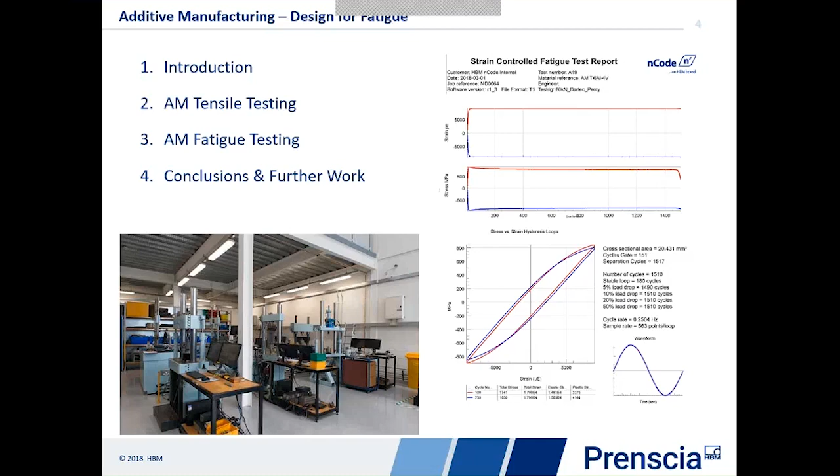I'll start with an introduction to what additive manufacturing is, then look at tensile testing and tensile properties of typical materials, then move on to what we're really interested in, fatigue testing. I'll conclude with some conclusions and a look at further work we're undertaking.

So why are we worried about additive manufactured materials and components? According to a British government survey, around $5.3 billion was the value of the additive manufacturing business sector in 2015, and the government's own figures show exponential growth. Clearly there's a lot of interest in additive manufacturing.

Why are we particularly interested in it from a fatigue perspective? A very recent report in 2015 from Lloyd's Register, the insurance company, showed that their number one focus recommendation was for the safety of systems containing 3D and 4D additive manufactured parts.

For those wondering what 4D means, these are components printed in 3D with residual stresses built in, so that when released, they can change shape. So we're manufacturing residual stresses into them, essentially.

That report goes on to say that fatigue is a principal failure mode of structural additive manufactured components, and it's a hurdle to its general acceptance. That's really where nCode comes in and why we're so interested, to find out if we can tackle that problem and make additive manufactured components safer and more reliable to use.

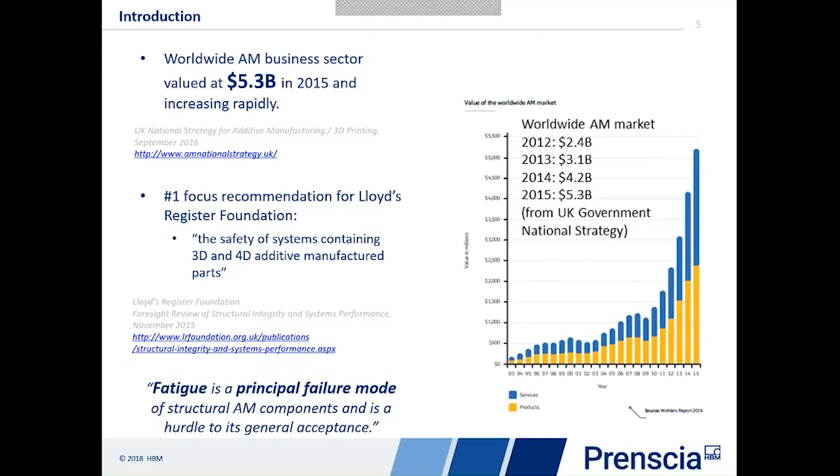What additive manufacturing gives us is a big increase in design freedom. It reduces the need for machining, and we can make components we couldn't before in an economical way, because we only use the materials we need. We don't have to mill them away from a solid block anymore.

Over the last 12 months, my colleagues and I have attended several additive manufacturing seminars, and almost all of them concentrated almost exclusively on topology optimization. A quick check on Google shows a huge number of companies dealing with additive manufacturing from this idea of optimizing.

But it's not all about shape. It's the material strength, and in particular the fatigue performance, which is crucial.

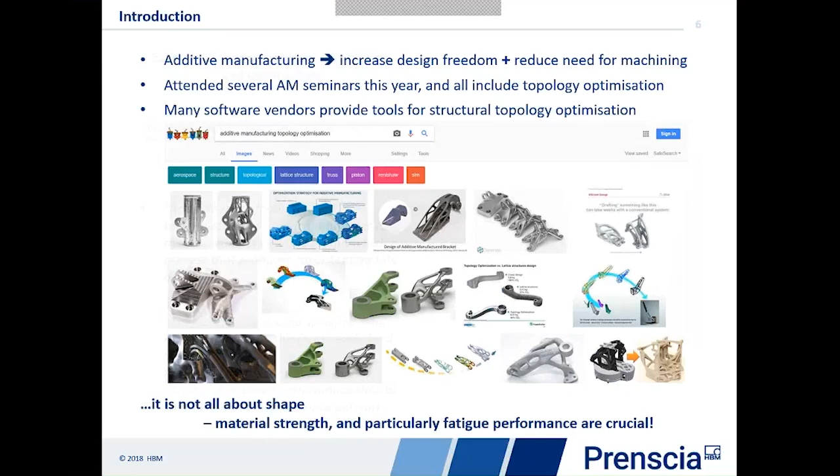Going back, this is again from Lloyd's Register, one example of a guidance note when it comes to certifying and qualifying additive manufactured components. It says additive manufacturing techniques have significant barriers to overcome in delivering a manufacturing process that produces consistent quality and safety. That's really what we're trying to tackle here.

It concludes by saying the acceptance criteria specified shall consider all reasonably foreseeable load cases. For example, if the part is subject to dynamic loading, the fatigue performance shall be specified with an acceptance criteria. It's about finding out how these materials behave in fatigue and how they differ from wrought materials.

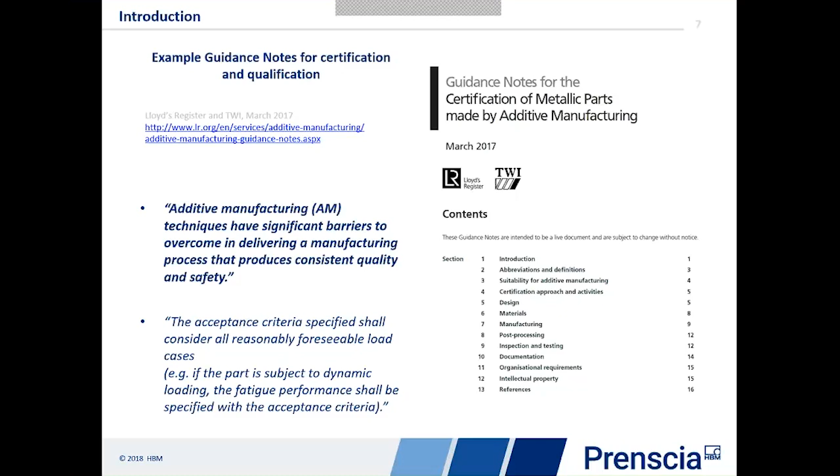Of course, this hasn't stopped us as an industry using these wonderful new materials and manufacturing techniques. Here are a few slides showing how they're used in different engineering sectors.

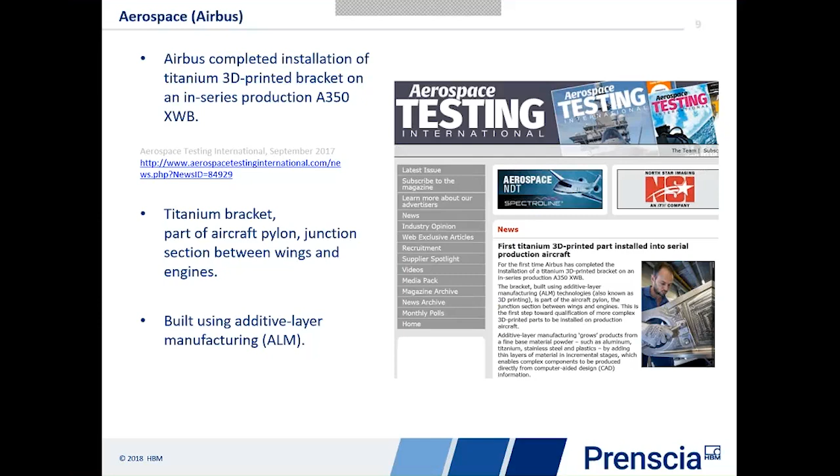Of course it's not just the heavy industries, we've also got aerospace. In 2017, last year, the first production component was put by Airbus into their production aircraft, a 3D printed bracket on the A350. And Boeing is not to be left behind, because last year they also approved their first 3D printed structural titanium components.

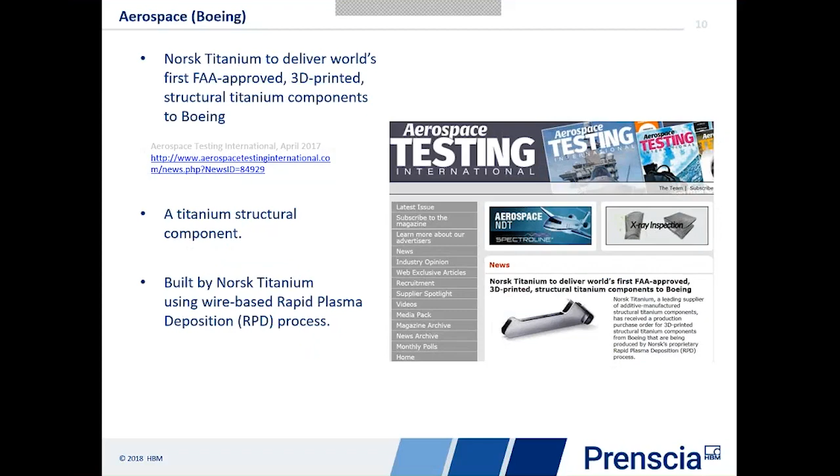There are other ways, as well as additive manufacturing, that we can start to build components. One of the key things is powder metal, which is one of the components of additive manufacturing, really.

So it's clear that additive manufactured components are actually very popular, and we need to discover more about how we can use them in our structural components.

So what's the objective of this presentation then? Well, primarily it's to show that fatigue testing is important when it comes to designing additive manufactured components. Secondarily, it's to obtain mechanical properties of a material, in inverted commas, that we can use in design and analysis.

I have to admit that when we started doing this work over 12 months ago, we'd had some involvement in additive manufacturing in fatigue, and up till that point, we'd not really found any materials that we've been given that have got acceptable fatigue performance at all. But starting really last year, we found then that we were getting components coming in which did show credible fatigue resistance. The key thing here is what constitutes a material.

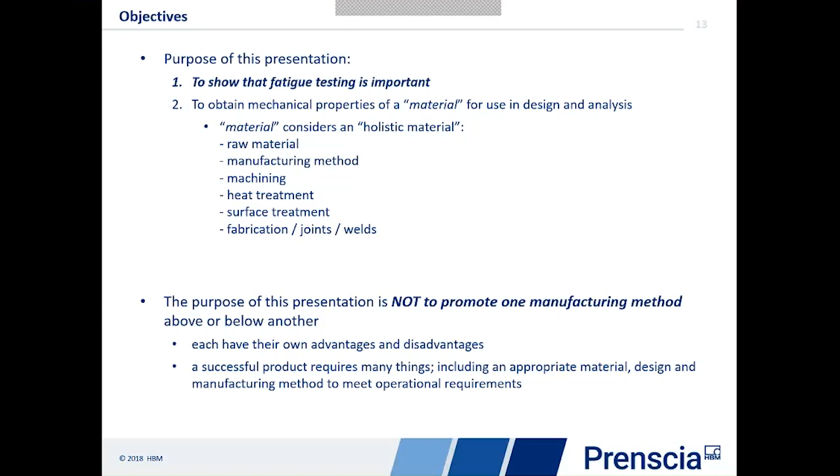This presentation today, I'm concentrating on one material in particular. It's a titanium alloy, Ti64. It's a wonderful material. It's high strength, high stiffness to weight ratio. It's got excellent corrosion resistance. And it's used in all industries: aerospace, automotive, oil and gas, biomedical, and so on. It's one of the most commonly used titanium alloys.

The reason that this is particularly well suited to additive manufacturing is it's notoriously difficult to machine. So the fact we can use this wonderful material through additive manufacturing means that it's got a lease of life really from that, because machining it ordinarily was awkward.

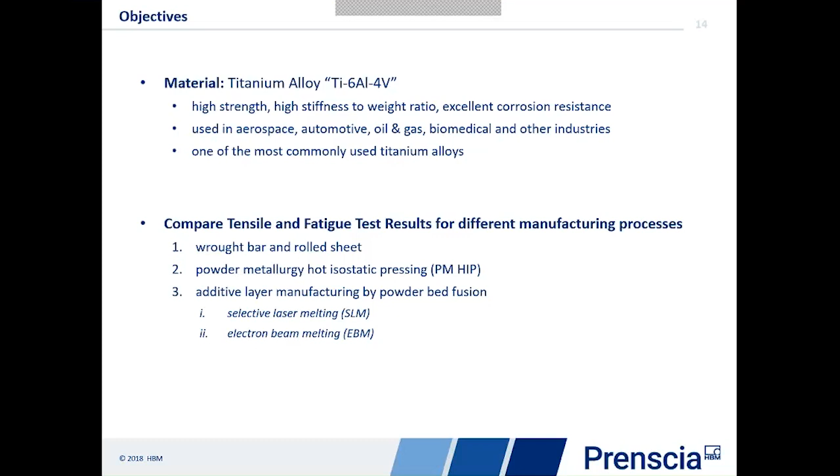What we're going to do is compare the tensile and fatigue test results, looking at different manufacturing processes with the same material. We'll start off with wrought bar and rolled sheet as our background level, so we can assess additive manufacturing powder metal in comparison to those. We're then going to look at powder metallurgy, hot isostatic pressing as a method, and look at how that compares to the wrought bars. And then we're going to look at two methods of additive layer manufacturing using powder bed fusion: selective laser melting and electron beam melting.

The method then that we're using here is, first of all, when it comes to powder metallurgy, a partner of ours has given us components which they've made using powder metallurgy and hot isostatic pressing. This really, I suppose, is a replacement or an alternative way of doing the type of casting things. We can fill a cast, if you like, with powder metal, and then through hot isostatic pressing, we can actually create a component like the ones that we saw earlier. These go into a furnace.

The pressures are typically 100 to 200 megapascals at temperatures between 900 and 1250 degrees C. The idea of this is it provides isostatic 100% densification. So it squashes those, heats them together and fuses them together to make a material and a component.

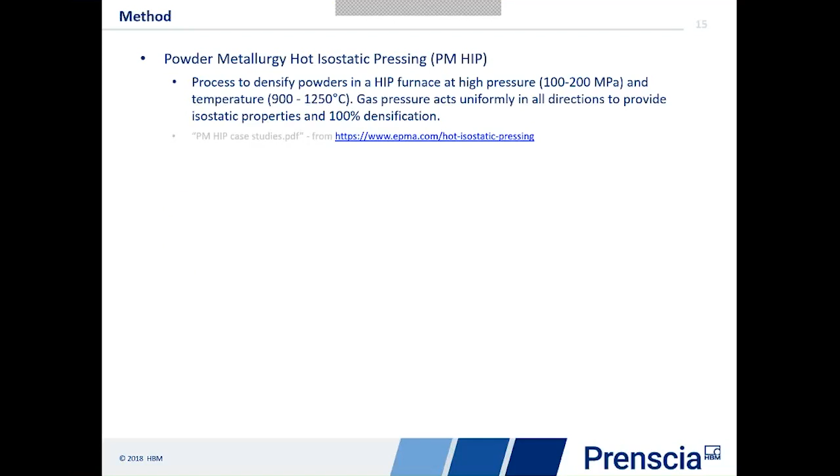The other thing we're looking at is powder bed fusion, so this is where we use selective heating. A typical process: we have a powder delivery system. This takes the powder from a thing and it lays a thin layer, and then we use a laser or some form of heat to locally heat it and to create the component. We're looking at two different scanners here, selective laser melting and electron beam melting.

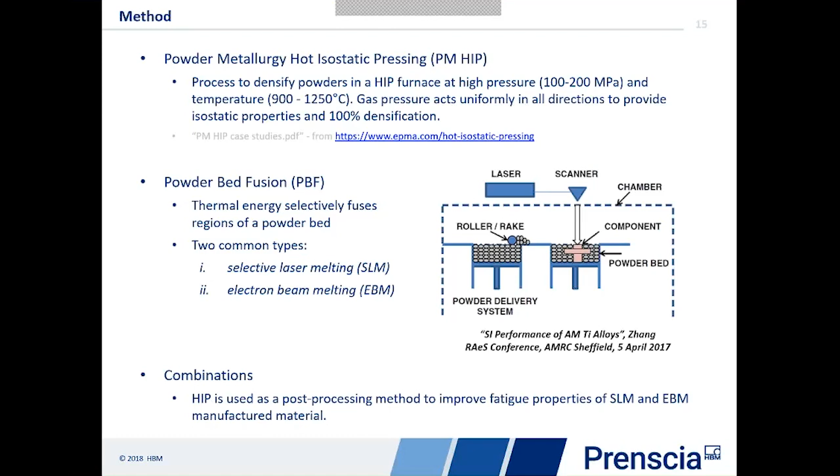In addition to those, we can do post-heat treatments as well. So we can create an additive manufactured component using powder bed fusion, and then we can heat treat it by hipping afterwards. This has the effect of homogenizing the properties somewhat, so they become far more consistent, and in our case, better potentially in fatigue. So we're also looking at different combinations of hipped or unhipped processes.

So first of all, let's have a look at the tensile properties when we do these sorts of tests. Electron beam melting, first of all, appears to have the highest yield and UTS values.

If we look at these plots below, what this is showing us is in the red square, we see tensile tests which have been cyclically stabilized before testing. So we've taken a tensile specimen and applied some fatigue cycles, usually a couple of hundred cycles to it beforehand. That enables us to get shakedown, and then we do the test.

The ones outside, to the left of that red box, these are the traditional monotonic tensile tests. We put a coupon in the machine and we pull it and do the tensile test. And what we can see here is the different UTS values for either bar, sheet, or powder metal HIP process, selective laser melting, and electron beam melting.

The first thing you notice is that we have quite a bit of scatter on the sheet when it's in the monotonic test. That's really the reason why we do cyclically stabilized tests in this case. The sheet and the rolling process can induce residual stresses, which can give us scatter. By doing that cyclically stabilized test, it reduces that amount of scatter somewhat.

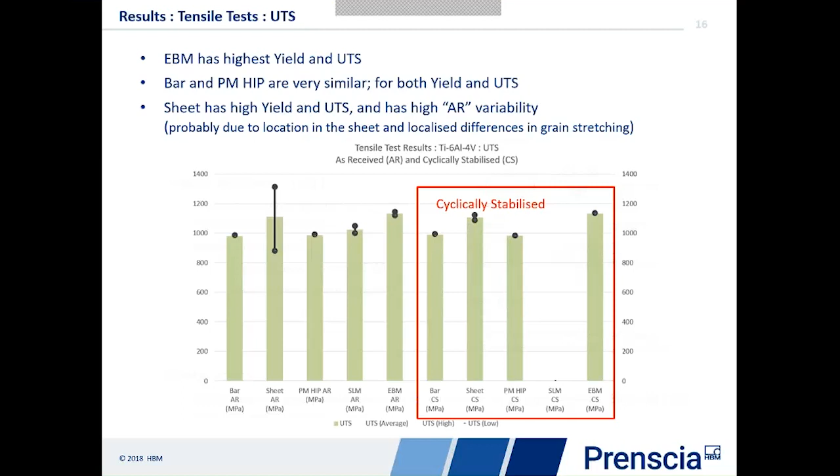We can also compare what happens with the yield strength as well, and again we notice there isn't really a big difference. Yes, the electron beam melting's got the highest yield, but really they're all within the same sort of ballpark as the bar and the sheet.

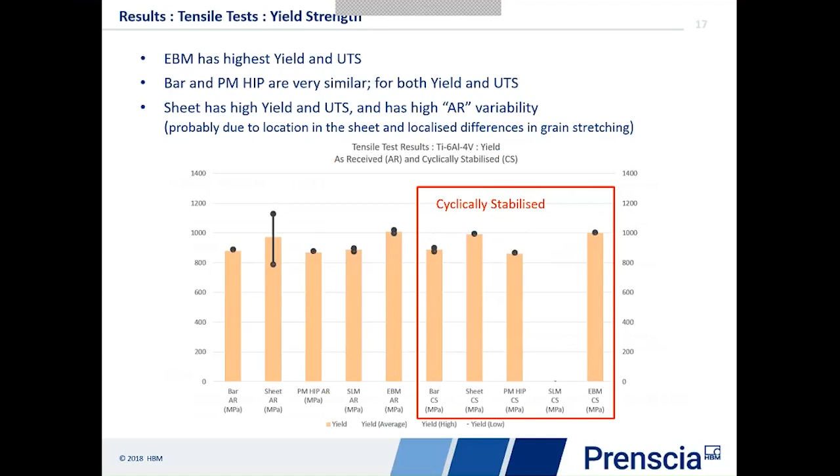Going further, beyond tests that we've done in our labs, I can show you some tests that have been done in a publication. You can find this on the internet or in a paper. Again, this one shows us the different expected tensile properties across a whole range of the same material under different conditions.

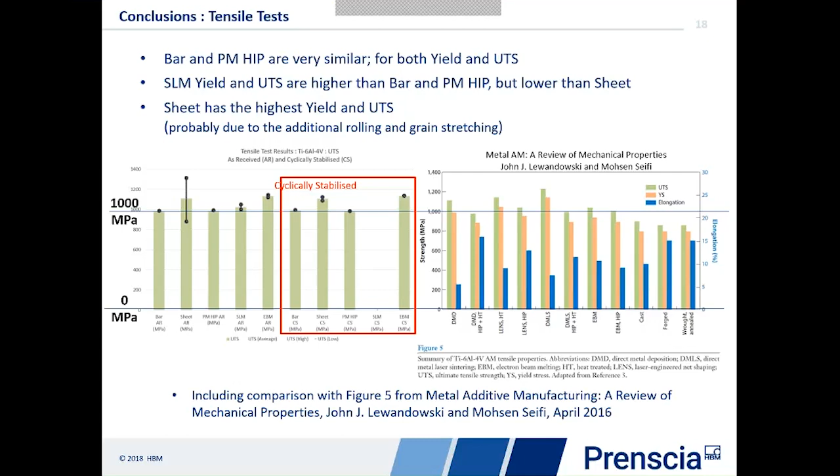And we see that what we're finding here is consistent results. So when it comes to tensile properties, the additive manufacturing results are pretty much in the ballpark of what we expect from the wrought materials. Tensile properties don't seem to be affected significantly.

So how about the fatigue tests then? Well, for the fatigue tests, we've used several different geometries. First of all, as our background wrought material, we've got 65mm bar stock material, and we've also got sheet material as well. These allow us to create a background of what a wrought material fatigue property curve would look like.

All the tests have been done at room temperature up to now. They've all been done under strain control using a sinusoidal waveform, and they're fully reverse tests, so equal compression and tension. Our failure criterion has been to look for a 20% load drop.

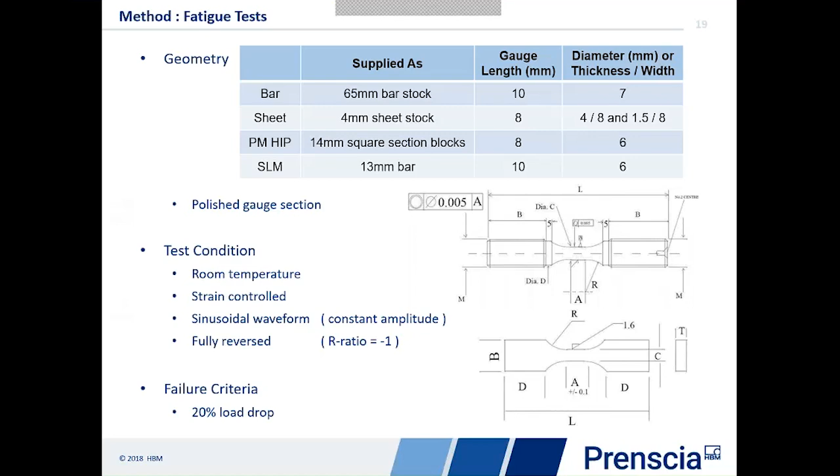So first of all, let's have a look at the fatigue tests from the standard bar stock and sheets. These are wrought materials and rolled sheets that we've got in our existing database that we've tested in the past. There are 65 samples in total, taken from 3 different batches: one batch of sheet and 2 different batches from 2 different manufacturers of 65mm bar.

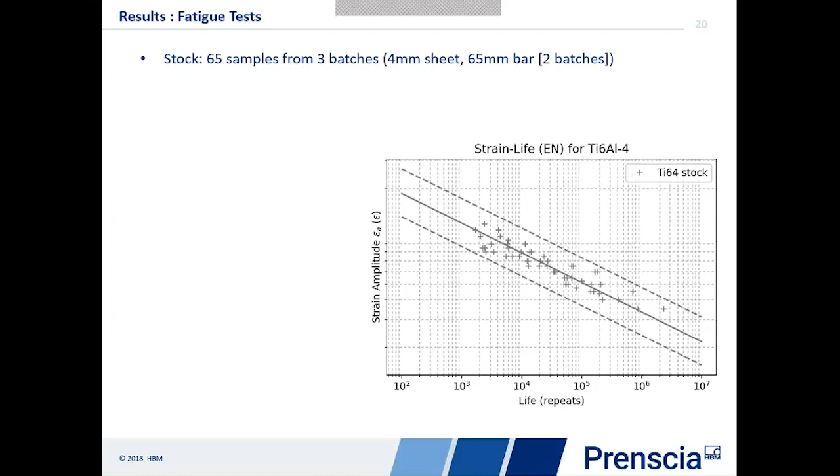So first of all, let's have a look at the electron beam melting. So far, we've tested 15 samples, though we've actually tested quite a few more now. But the 15 I'm putting here have all been tested with a HIP post-treatment.

What we find is that at the low cycle fatigue end, they're tending to be similar material to the standard stock, in the same way as the tensile properties are similar. But at the high cycle fatigue end, we're seeing that the fatigue performance is not as good. That's exactly what we would expect, because at the high cycle end, surface imperfections, porosity, and irregularities become far more dominant. At the low cycle end, the load is the most important thing, but at high cycle fatigue, it's all the little things like surface effects and porosity which become increasingly more important. So this is exactly what I'd expect.

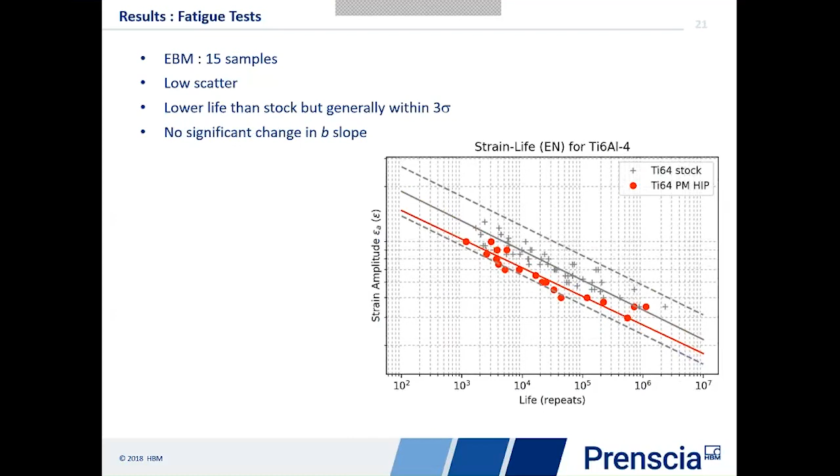Now this test considers powder metal hipped, with 25 samples here. The first thing we notice is there's more significant scatter. It's not bad—it's on the order of the wrought material, but there's a bit more scatter than before. Still, the life is within that 3 sigma band, and in this case there's no real significant change in the B slope either.

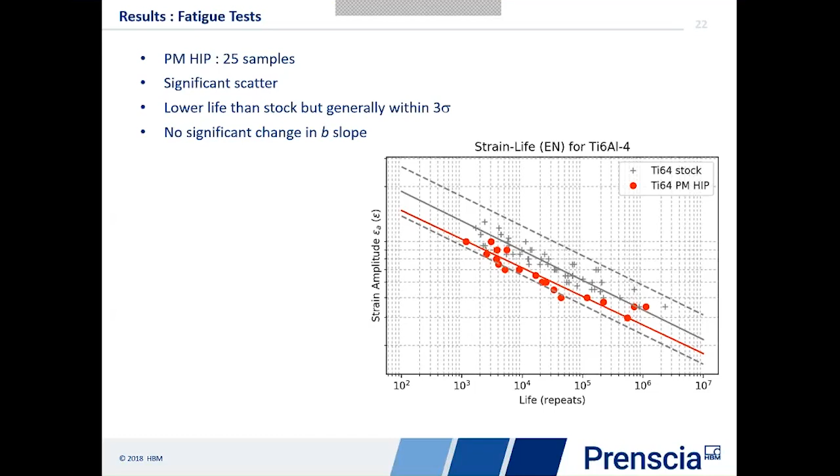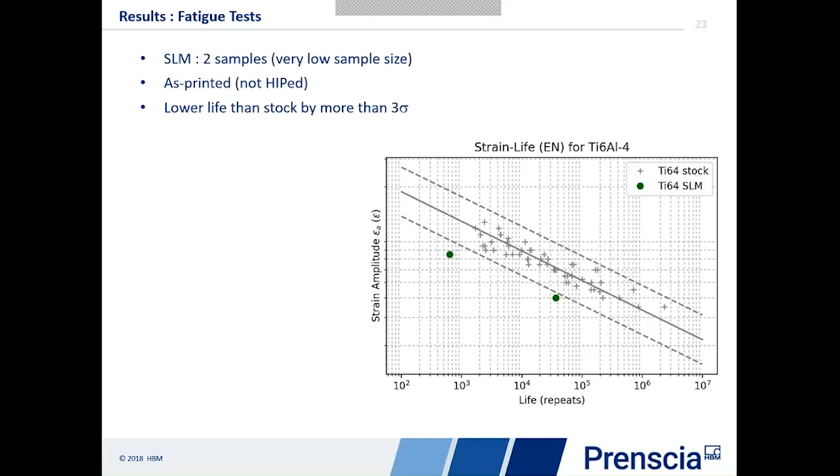So that's something we're going to concentrate on in the next few months.

So in conclusion, when we look at fatigue tests, I think you'll agree that even with hipping and things like that, additive manufactured components and powder materials generally have a lower life than the original stock material. However, modern HIP processing can generally bring the life to within 3 sigma, and that means it becomes practical for real structural applications.

Material testing and characterization are really essential when looking at both powder metal and additive manufactured processing. You can't just use the fatigue properties of the wrought stock data—you've got to go and measure them, and that has to include the process you're using, the manufacturing process, and the heat treatment process afterwards.

But one of the really nice things to come out of this is that it's proving we can use ordinary strain life methods, in the case of this Ti64, to predict the fatigue of additive manufactured components. That's something new—something we didn't necessarily expect at the beginning.

At the beginning of this, we went into the analysis thinking there were probably 3 cases. The best case would be that we could use EN or SN techniques. Failing that, we'd look at initiation from porosity and imperfections as an approach. And if that didn't work, we'd probably look at using an approach based on composites-type analysis, treating it as a composite material.

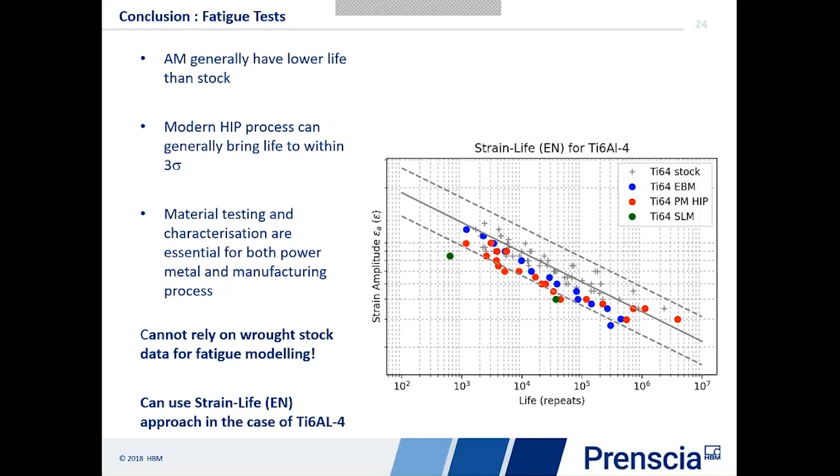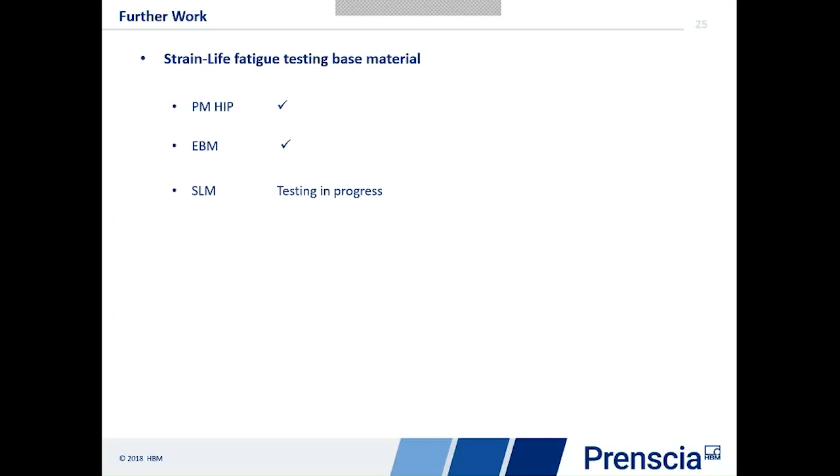So what have we got left to do then? Right now, we've done the strain life fatigue testing on base materials. We've also looked at powder metal with a HIP processing, and that's shown to work very well. We've considered electron beam melting, and we've looked at selective laser melting, but we've still got more work to do on that because at the moment we've only got those two samples that we've tested.

We're also working with the university here on an EPSRC grant. This is looking at wire arc additive manufacturing. It's almost like, if you think about it, making components out of weld metal. So these are much larger scale components that we can do here with some interesting heat treatment techniques.

We also want to look at some component validation. Now, technically, a specimen that we're doing, an hourglass specimen, is a component when it comes to additive manufacturing because we have to print that component, but we know that we also do a lot of machining too, and we also want to look at how much we can read across from real small components which have been printed. So right now we're looking at getting component validation using the same base material.

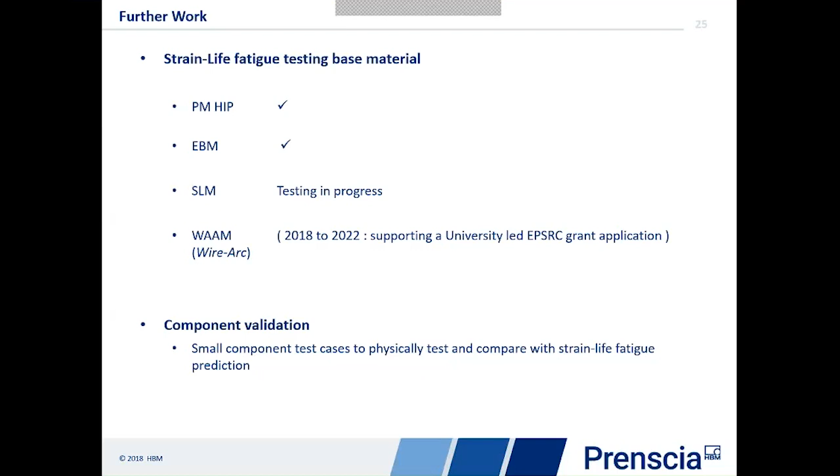In addition to that, there's other important things that we know we need to look at. The first one is build orientation. Right now, all of our specimens have been printed in the A direction. Essentially, they're cylinders which are vertical, and we build them up layer by layer in that plane.

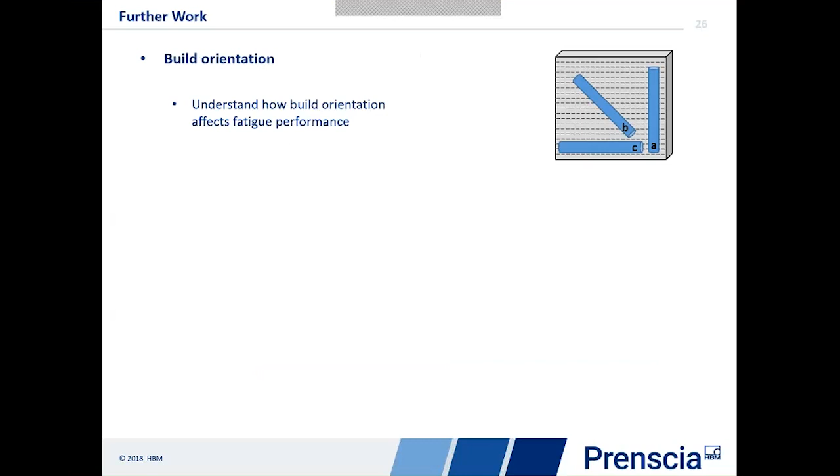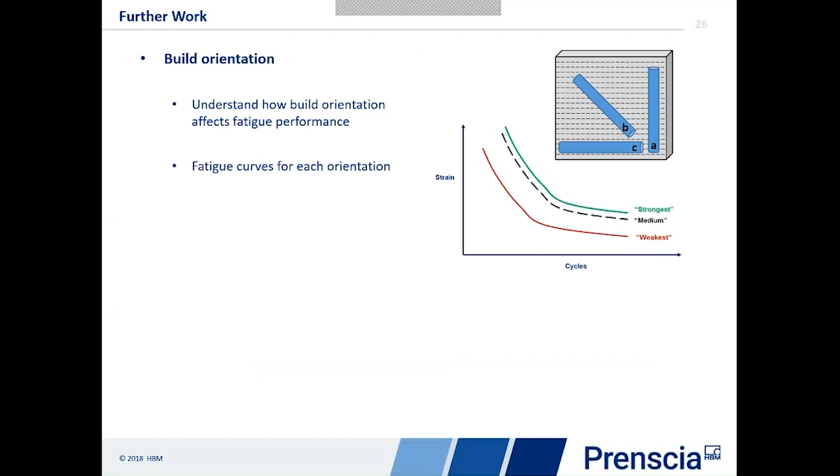Now, we also need to consider what happens if we build them up in different angles and how that performance changes. Is it going to be that they have a strong and a weak direction from doing that? And if they do have a weak and a strong direction, is it sensible just to always assume the weakest curve and design on that basis?

In order to do that, we need to understand what degree of scatter there is in those curves, and also how that's affected by those heat treatments, because certainly our initial look-sees seem to be claiming that the heat treatments afterwards, the HIP treatments, are helping us to homogenize these materials so we don't get this orientation effect. But this is something that we really do need to research more fully.

Now, we do know as an industry already that we take care of, when we've got areas of high stress, then we very often orientate the printing of the components to make sure we have a favorable layup when we've got those high stressed areas.

But again, what I'd like to do is to just be able to quantify those effects to see how we need to model them. Of course, the worst case scenario in terms of modeling is that we treat everything as a composite, which has non-isotropic properties, so different properties in each direction. We've still not ruled that out, but so far the results are looking quite favorable.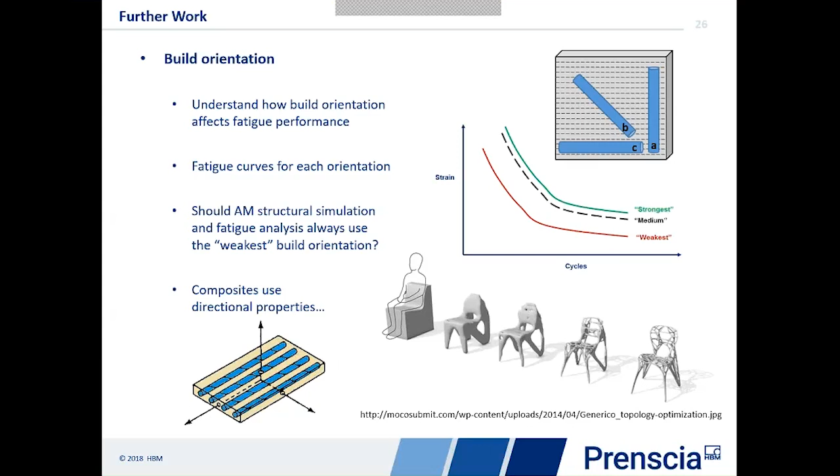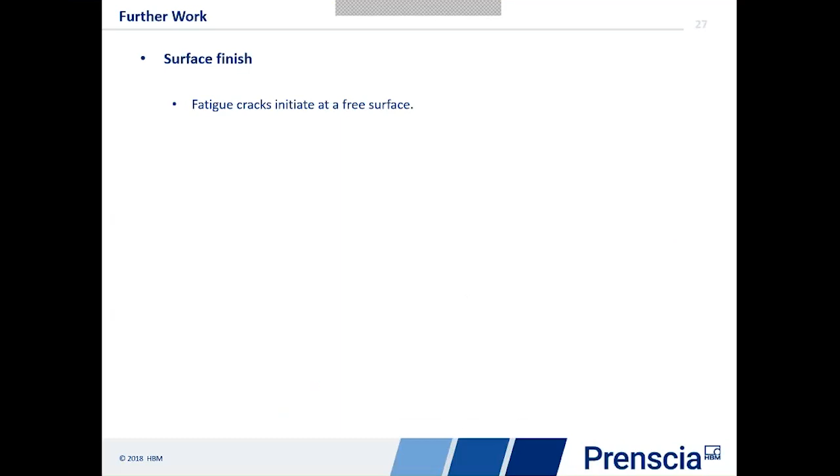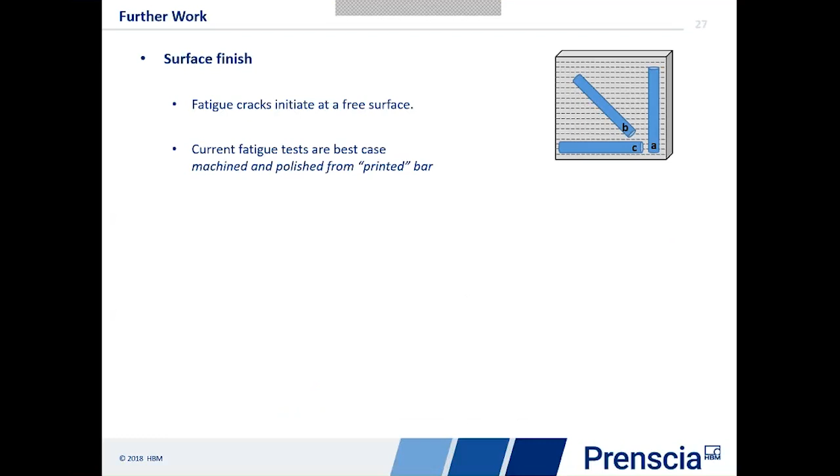The other thing that we want to look at is surface finish as well. We know that fatigue cracks initiate at a free surface. The thing that we've tested right now is we printed bars and then we've machined the bars into typical fatigue coupons. What happens if we were to print the coupons themselves?

In many cases, when we're looking at additive manufactured components, we're printing surfaces and we can't always get to polish those surfaces, and we know that fatigue initiates at those surfaces. So what can we do to estimate the effective surface finishes? We're looking here at basically as-printed net section shapes for testing. How do they all compare?

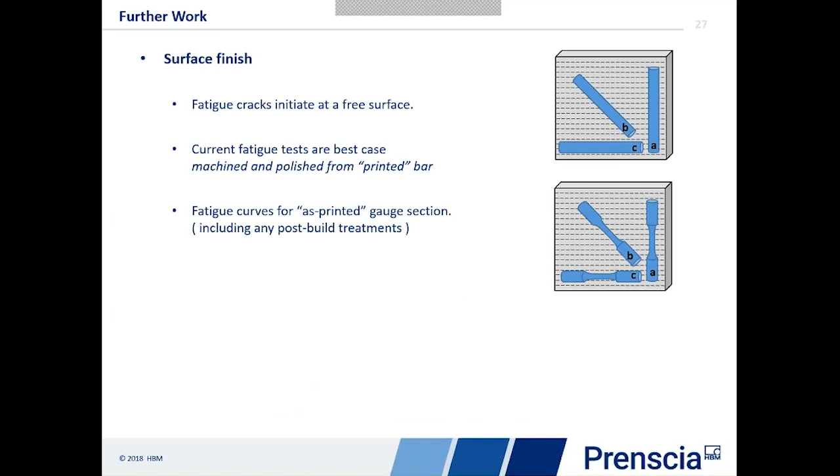And when we've got a structurally optimized topology, it can be very difficult to try and improve the surface finish.

One of the problems with bad weather in England, you get a cold at this time of year. Sorry about that.

So when we come in to print these intricate geometries like you see on this wonderful illustration here, a lot of those internal surfaces we can't get to polish or to improve. We can't necessarily shot peen and things like that, the normal tricks that we do. So in this case, it becomes really important to see how net section shapes affect fatigue so that we can start to analyze that and build those into our analytical models.